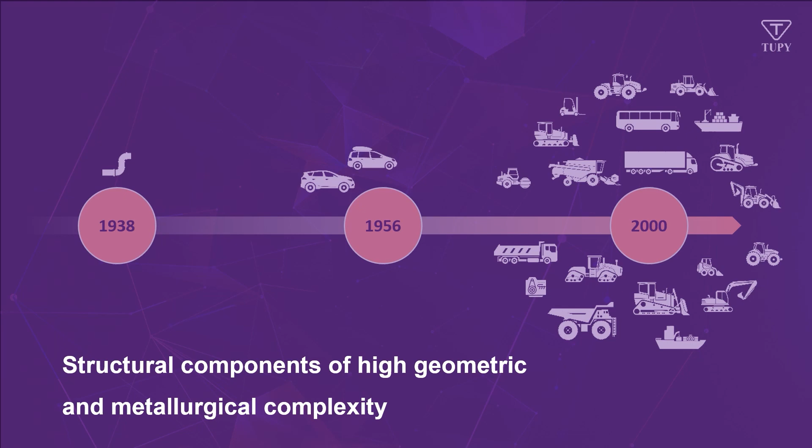The main products are still engine blocks and cylinder heads, but we make all types of different structural components for this type of applications. We supply a variety of parts to different capital goods producers. Our customer products have significant impact to improve life quality of people.

We have 3 plants in Brazil, 2 in Mexico, and 1 in Portugal, with a strong presence to global markets as North America and Europe. Our position provides advantage to combine access to clean energy as well as local content supply. Tupy is an 85-year-old company, known by its global competence for cast iron parts.

However, we have enlarged our portfolio on complete machined parts and assembling of full engines. Several other diversification paths are being explored to support the decarbonization in a broader aspect than transport. As mentioned before, our recent acquisitions allow us to go further on value added to our customers, from castings to

full assembled engines. The future will be multi-energy. Supporting our customers on the transition is strategic, including the capacity to support the development steps with our engineering services. Now let's talk about challenges for humanity. Our world has 2 very big challenges: inequality and climate change.

The result is that energy consumption and CO2 emission levels should be strongly concentrated in developed nations. Then, restricting the access of energy in poor or underdeveloped countries is not a path to reduce inequality. Besides life expectancy, there are several other demands in society that will also increase the energy demand.

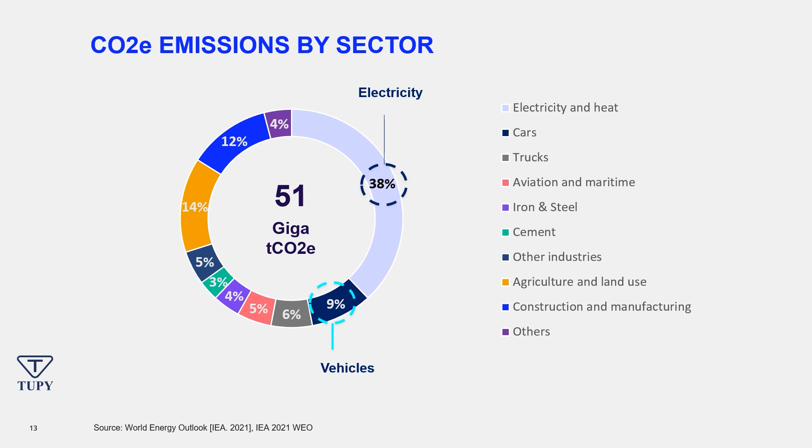By 2040, it is estimated an increase of more than 30% primary energy to be consumed than today. And such demand increase does not count a significant reduction of inequality. When we talk about energy, we cannot forget that it is strongly linked to effective CO2 emission. So, at the same time, the energy demand increase needs the access to clean energy sources.

Looking to historical data, we can be happy with the improvement we got out of energy efficiency, reducing in percentage our annual increase of energy demand from 2.3% per year to 1.3% per year. However, in terms of CO2 emission, it is important to check the portion of renewables compared to fossil energy.

From 2010 to 2021, primary energy outlook, we saw an extraordinary increase of renewable energy generation. However, its increase is equivalent to 1/3 of the energy demand increase in the period. That results in absolute increase of fossil energy consumption. So, we need to rethink this model and help decarbonization with additional actions in short and medium term.

It is possible to indicate 4 steps of activities to help decarbonization. Number 1, use existing technologies to promote higher efficiency levels. Number 2, there are plenty of energy sources being wasted, and we have to evaluate the best use of them.

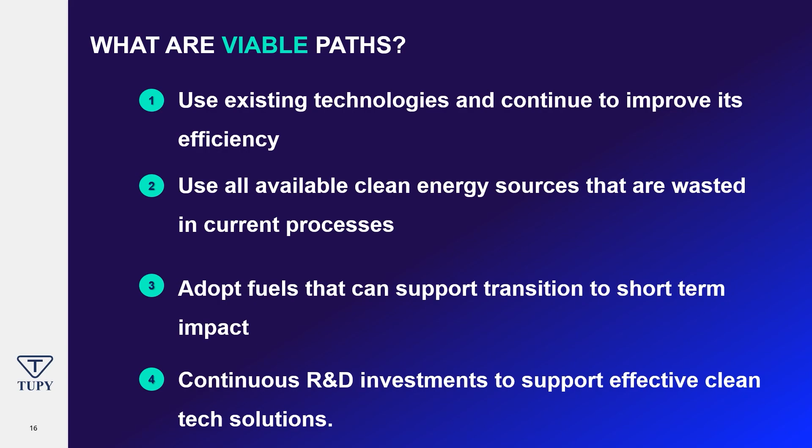Number 3, even inside fossil fuel options, there are significant decarbonization steps possible to be taken to achieve a much more reasonable level of CO2 emissions. Finally, we need to continue investments on research to support bolder steps afterwards. Starting on efficiency to reduce fossil fuel consumption.

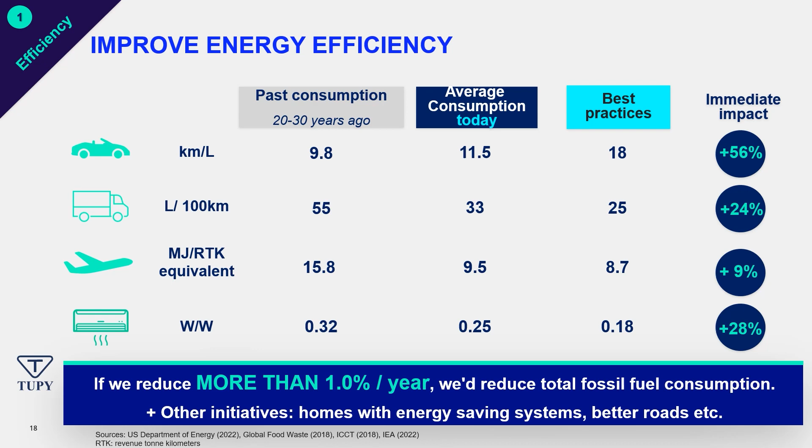Comparing with today, we had a very good improvement in efficiency over the last decades. However, even today, there are best practices not mainstream yet. Only with that in focus, we can reduce fossil consumption at a very fast pace. It is not only in transportation, but also in buildings, computing, waste management, food, and so on. The efficiency work can also be extended to the areas of logistics.

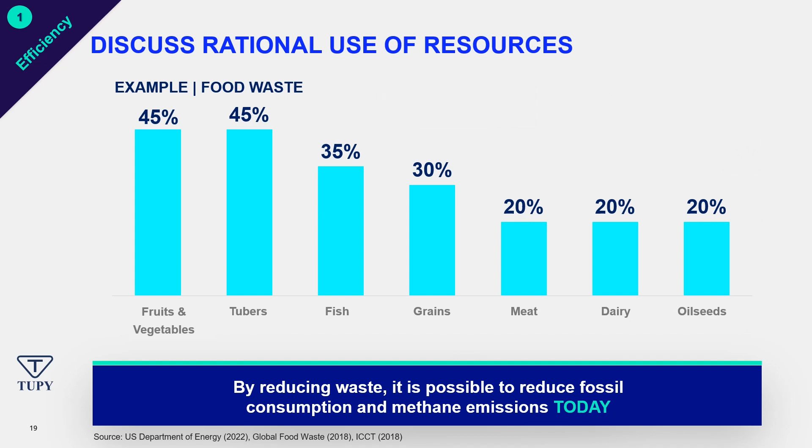There is always a discussion indicating a dilemma between food versus fuel, which is not realistic. Today, the level of food wasted is much higher than the level of people with no access to regular food supply, about 10 to 20%. Improvements on logistics could reduce energy consumption, reduce CO2 emission, and improve social inequality.

As presented last year here in the Vienna Motor Symposium, we developed the combination of high-resistance material with thin wall casting process to enable the transformation of structural parts from aluminum to cast iron, what we call the ultralight iron technology. We used as a demonstrator the block of a series passenger car, achieving same weight with improved stiffness, less CO2 emission, and also lower costs. A similar approach is being used on other parts like engine heads, gearboxes, and clutch housings.

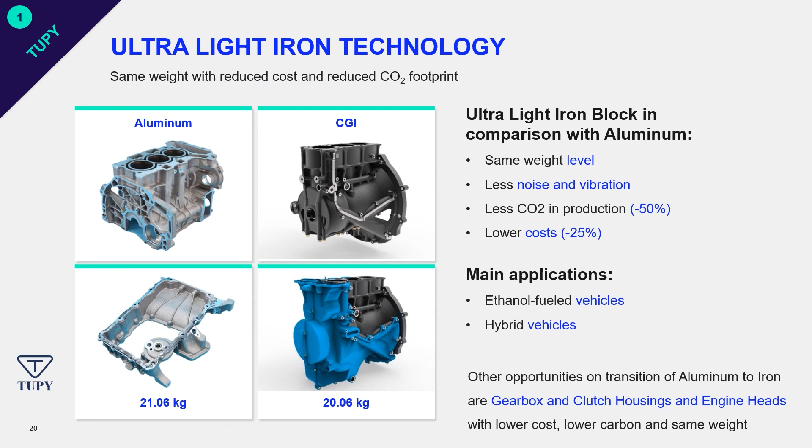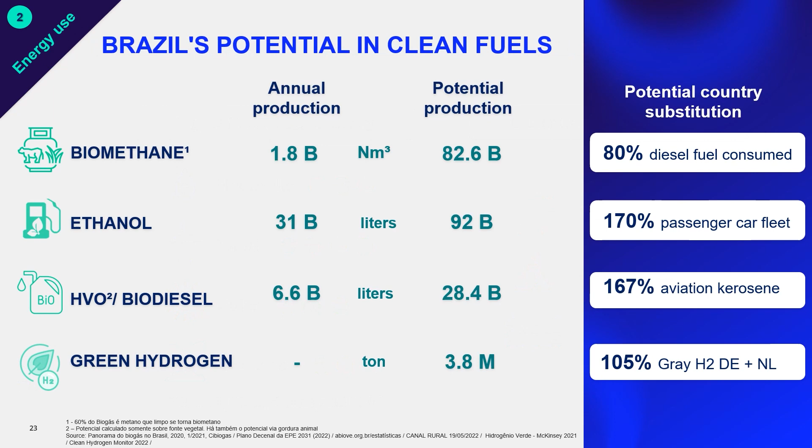Moving now to boost the use of clean energy available, it is possible to indicate that there are several clean energy options. Depending on the countries, more favorable conditions can be explored locally or globally due to the availability of natural resources. Using Brazil as an example, we can see several chances of energy generation that can not only decarbonize the country, but also help other countries through exporting. Notice that all this potential is not considering the increase of land use or technology improvements yet.

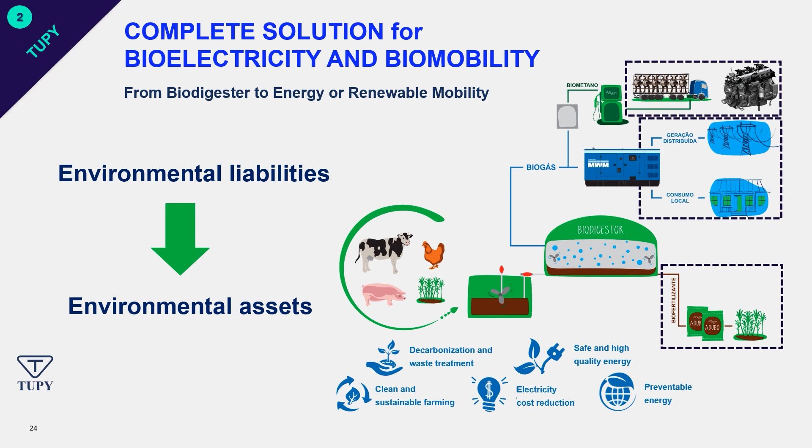Tupy is a leader in Brazil to provide full solutions for transforming organic matters into biogas and biomethane, as well as using it in gensets and trucks. We support the complete design of the facility, including its operation. We are also installing complete systems to support farms to decarbonize its residues in the production of biogas and biomethane. It enables also the production of biofertilizers.

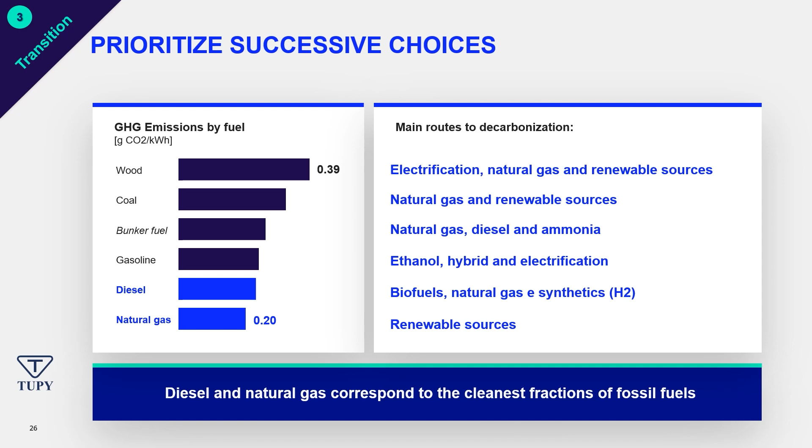However, not only clean energies play a role in fast decarbonization process. We need to separate different fossil fuels properly by its carbon intensity. Notice that even inside fossil, it is possible to achieve significant decarbonization levels. That should be in consideration for an effective transition. Natural gas in areas with clear access to that should play a major role.

Another important aspect of natural gas is the possibility to assure supply for applications using biomethane while its production is being increased. In a similar perspective on transport, we can see the use of natural gas or biomethane as a strategic step to enable fast decarbonization and support the infrastructure transition to gaseous fuel at the same time.

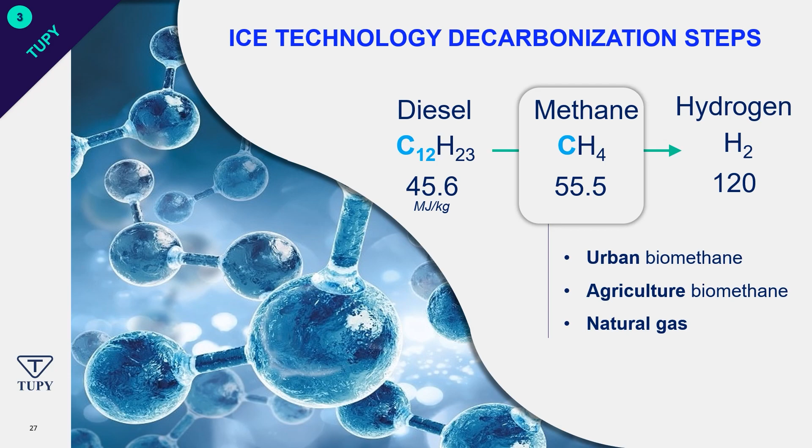In the last point, but equally important, we cannot reduce the R&D investments on future disruptive technologies once they are critical to long-term decarbonization. Several technologies are on radar for decarbonization. However, they are not mature for short-term applications, or its use now can generate higher emissions in some conditions. Investments need to continue to allow more flexibility and higher impact on decarbonization routes in the future. As well, some of these technology solutions demand infrastructure to make them effectively clean.

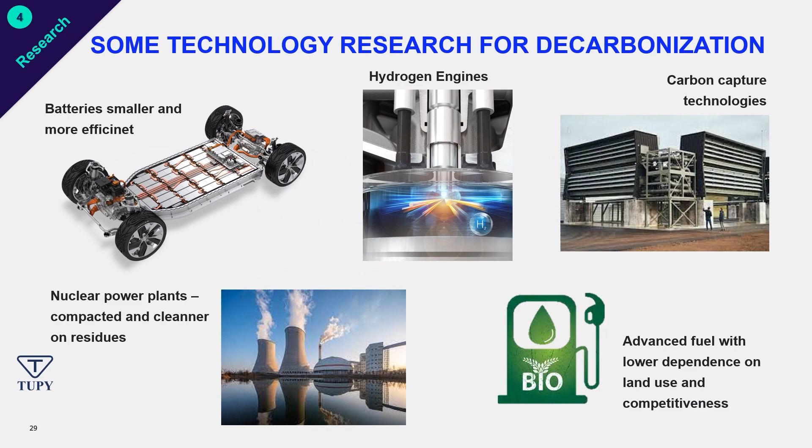For example, we all know that electrification in transport is a very important path for decarbonization. But depending on the vehicle type and size, it can be much more critical to the environment. Regarding battery size, the electric vehicle carbon footprint using clean energy electricity on operations can take 3 to 5 years to reach the same level of an equivalent vehicle in combustion. That is linked to the big carbon footprint to produce the batteries and also do the mining. There are other impacts on natural resources like water and land use.

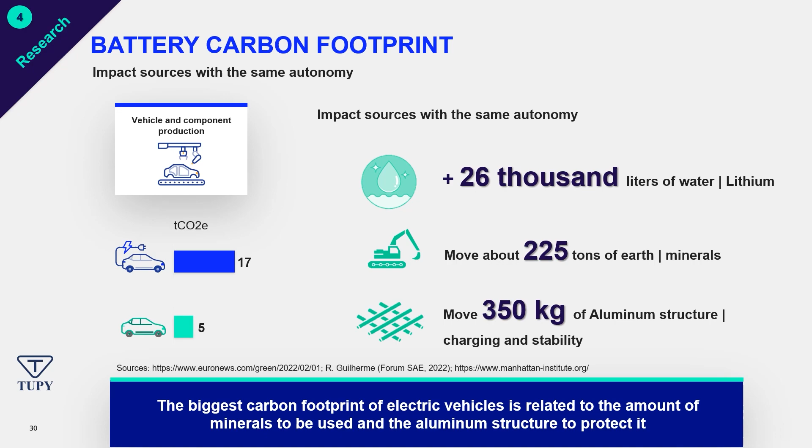In terms of total life CO2 emission at light vehicles, biofuels present much better and faster decarbonization potential nowadays, while battery production cannot be completely clean. That is the reason as well that hybridization sounds a strategic path in short and medium term to help decarbonization. On commercial vehicles, the use of hydrogen is another strategic path with very important focus.

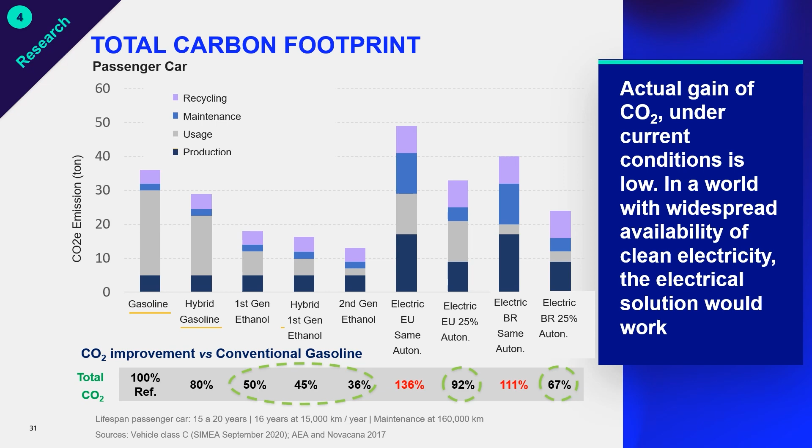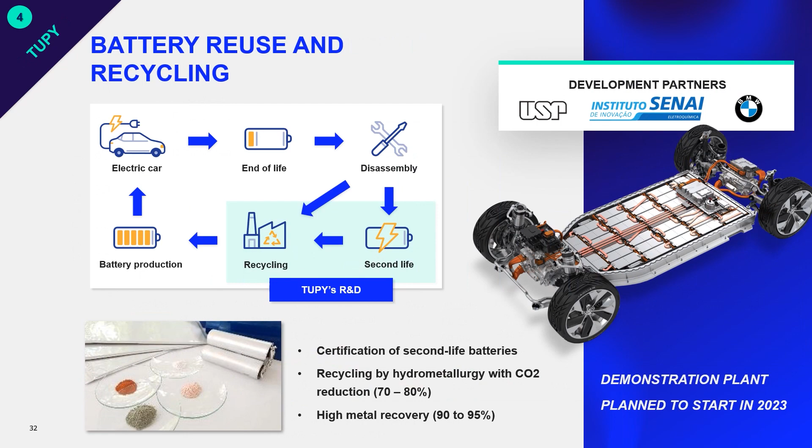At Tupy, we have under development a clean and high efficiency process to recycle batteries out of electric vehicles. It will support the decarbonization of battery manufacturing, which is critical today, as well as support mineral supply that can become short soon. We are implementing a demonstration plant in Brazil by early 2023, and later to spin off this plant concept internationally as customers will demand. Our patented recycling process has the novelty to allow the hydrometallurgy process to operate flexibly with different battery chemistries in the same batch, allowing improvements on productivity, enhancing cost competitiveness.

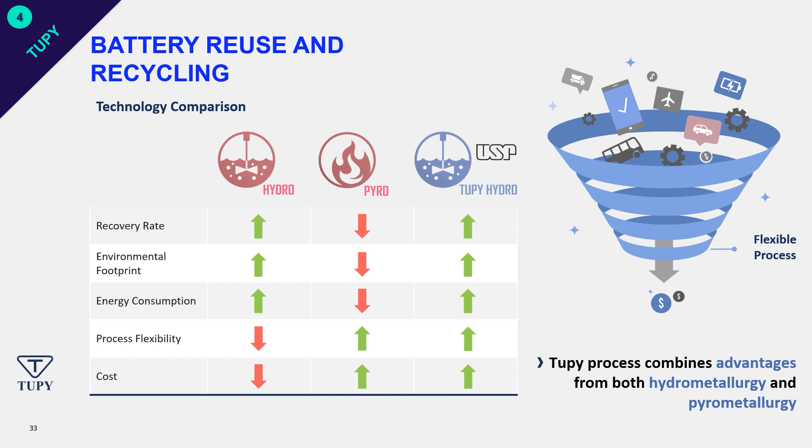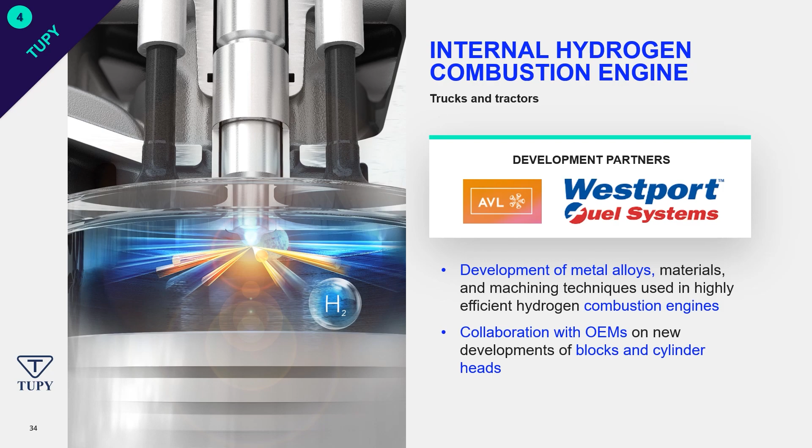And now our conclusions. Energy is critical for life quality, and we cannot restrict its increase to the most vulnerable and developing nations. However, we need to put in action all possible solutions for a fast decarbonization. That's the reason we came with these priorities. Number 1, energy efficiency with existing solutions. Number 2, access all types of clean energy. Biofuels like ethanol and biomethane must play a significant role.

Number 3, even on fossil, to favor low carbon intensity, as natural gas as an example. On R&D, to keep investments to mature technologies and infrastructure to get effective clean solutions on the entire life cycle. And we cannot forget that legislation is an important place to enforce such paths, and that cannot restrict the evaluation scope different than life cycle approach.